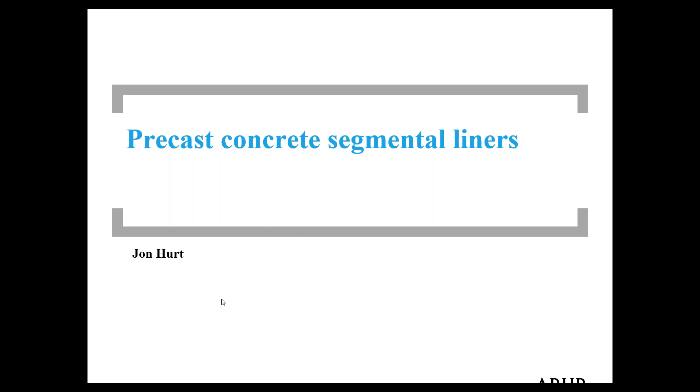Thanks very much for this opportunity, and as Colin mentioned, my topic's going to be precast concrete segmental liners. I think Colin already went through the introduction, so I won't repeat this again. But I've been working with segmental linings for over 20 years now and seen them develop quite a lot in that time.

So I guess as an overall introduction to segmental linings, just to go through some of the reasons we use them and the benefits they give us. Segmental linings allow you to place immediate support behind your tunnel boring machine. Obviously this is something in soft ground that's essential. You need to provide that immediate support there after you've excavated the ground.

They also allow a one-pass tunnel lining system, so you're putting in support as you tunnel, but you can also use that as the permanent support. You don't need to come and put another lining in place. So that's different, say, to a rock tunnel where you can go along, put in some temporary support, and then come along and cast a lining later. A segmental lining, which you can use in either soft ground or rock applications, allows you to put in a one-pass system straight away.

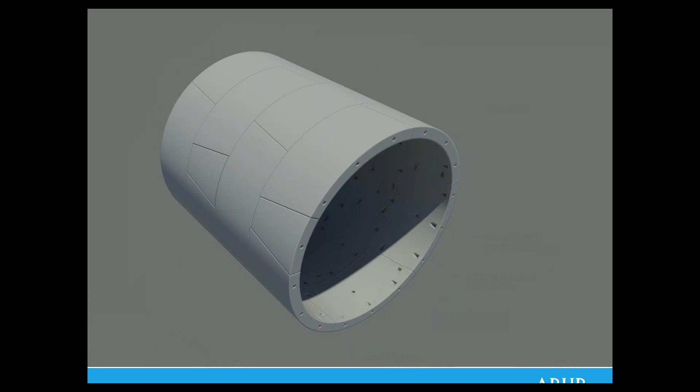To go through some terminology, first of all, this is an isometric of a tunnel lining, and the lining is made up of a series of rings, which you can see here. The length of these rings will vary with the tunnel diameter and the TBM equipment. Generally, the larger the tunnel, the longer and wider your ring can be. So you may be down at about a 4-foot ring in some of the smaller tunnels, whereas you can be up at 6 feet plus in some of the larger diameter applications.

Each ring is made up of a number of segments that will be assembled to form the ring, and I'll talk through some of the different geometry that we can get in the segments. But one important segment in the ring is the keystone, which is the last segment to be installed and makes up the circle.

The inside lining is often referred to as the intrados, and the outside is the extrados. Then we have a series of joints between segments: the longitudinal joints, which run along the alignment of the tunnel, sometimes also called the radial joints, and the joints at the face of the ring, known as the circumferential or circle joint.

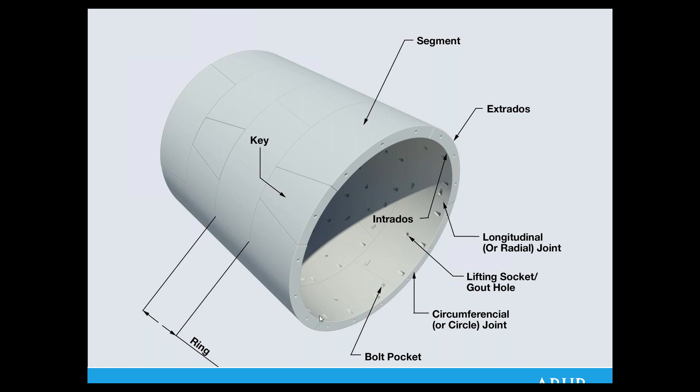I've put some useful references on these slides, which I believe will be available afterwards, just talking about various different guides on design, manufacture, and erection of segments into lining. There's the French Tunneling Society, AFTES, the British Tunneling Society, and the ITA has some guidelines, among others, and there's a good paper I've referenced as well.

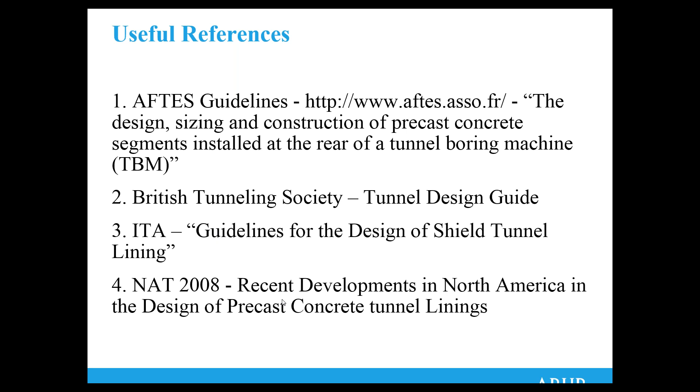So I said I'd talk through some of the different lining configurations, and these images are taken from the publications I mentioned, if you want to look into this in more detail. A rectangular lining, essentially, apart from the keystone, all the joints are 90 degrees, so it's a rectangular shape for each of the segments if you unrolled the tunnel flat. This is, I guess, how tunnel linings, segmental linings started off, and they're still very common today, especially in the very large diameter tunnels.

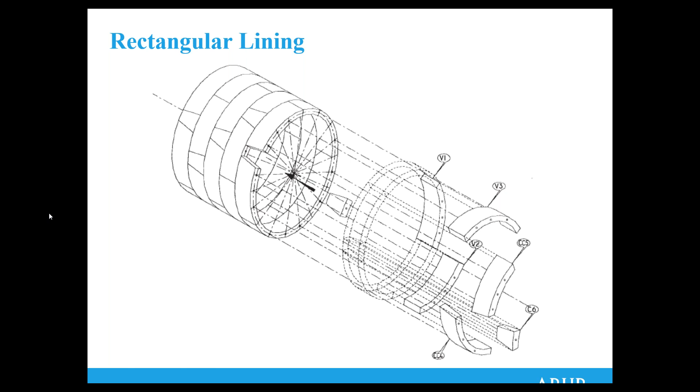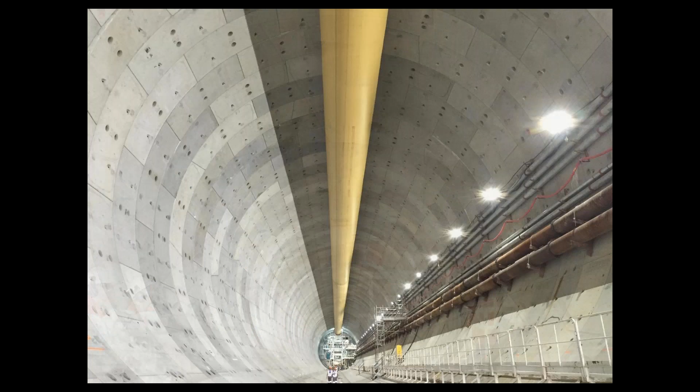This is currently the world's largest TBM tunnel. It's the subsea connection between Hong Kong Airport and the mainland that Bouygues is just finishing off. You can see here they've used a rectangular segment. The only angled joints are when you have a key, and it's a relatively large key here.

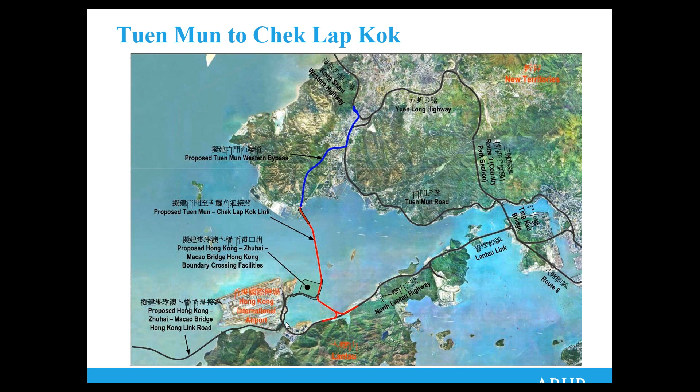Just to show you a bit more about this project, it's about 4 kilometers in length, running from mainland to the Hong Kong airport. The section highlighted there, through the section of reclamation, needed enough space for 3 traffic lanes and a climbing lane, so they used an extra large TBM, pretty much running the length of this reclamation.

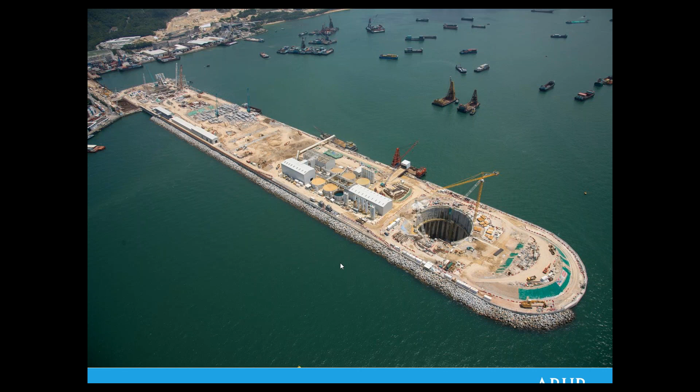Closer to home, there's also another very large diameter tunnel. In fact, I think the internal diameter of this tunnel is the largest, but the TBM is slightly smaller.

Up in Seattle, the SR99 Alaskan Way replacement tunnel - those following the news closely know that within a week it should be breaking through. There's just over 200 feet remaining as of yesterday. So it's interesting to see, again, a rectangular segmental lining. This time the key is a smaller key.

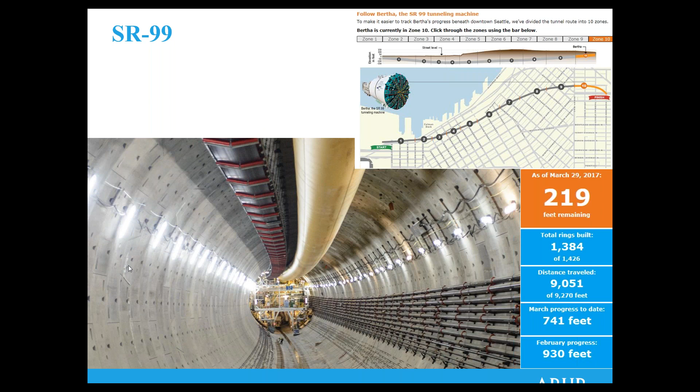As segments developed, people introduced the concept of angled joints, and this brings some advantages. One is you avoid the situation where you could possibly have 4 joints aligning, which is known as a cruciform joint, and that's not good for waterproofing with the gaskets. So this helps to avoid that.

This also brings the advantage that when you are installing the segments, the gaskets on the longitudinal joints are not in contact for such a long time, and it helps with the erection of the segments without damaging the gasket.

So this is a trapezoidal lining. It's also known as a universal ring because it can be placed in many different configurations.

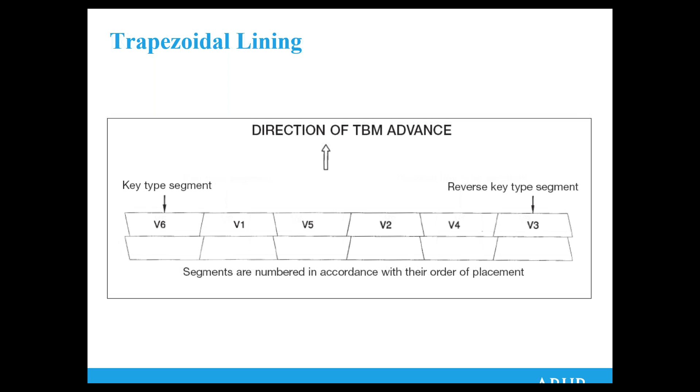Similar to that is a rhomboidal lining, which is very common these days. In this case, you start off with a counter key, which gets placed first, then you have rhomboidal segments, and you finish up with a regular key segment.

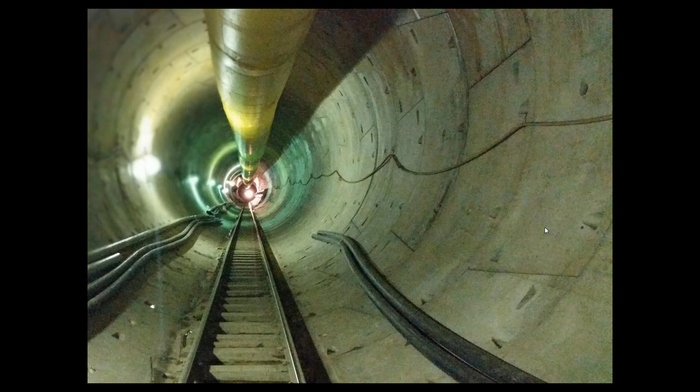And this is a photo from Lake Mead intake number 3. It's not a great quality photo, but this was a rhomboidal segment arrangement where we had five segments plus the key.

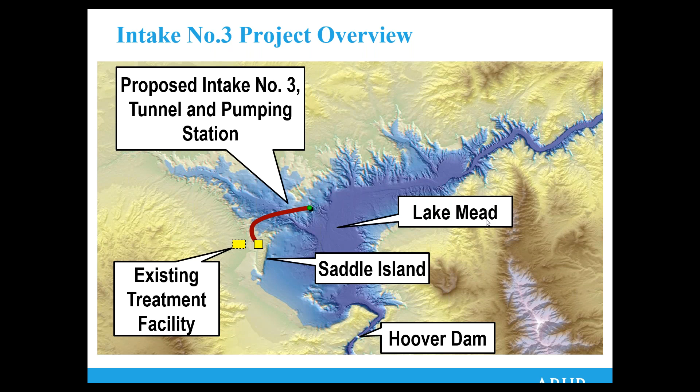Just to talk about this project in a little more detail, this is currently the world's deepest subaqueous tunnel. The lining and the TBM were designed to handle pressures of up to 17 bar, which is 170 meters of water head. It starts off in metamorphic rocks on the shore and heads out under the lake, and most of the drive was in sedimentary rock.

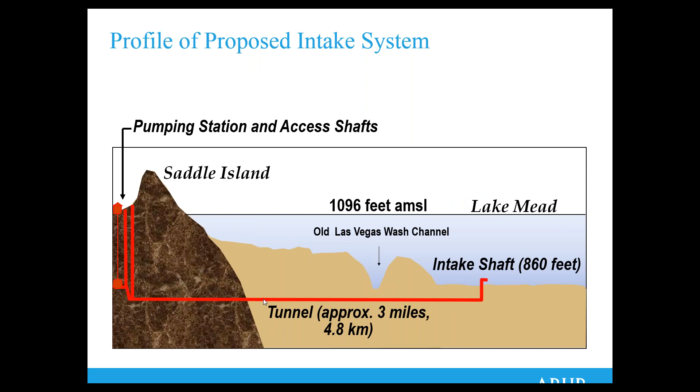So those are the main types of linings that you'll commonly see used, and I wanted to also cover a couple of other types that have specific uses. We don't see them so much these days, but they are suitable in some projects.

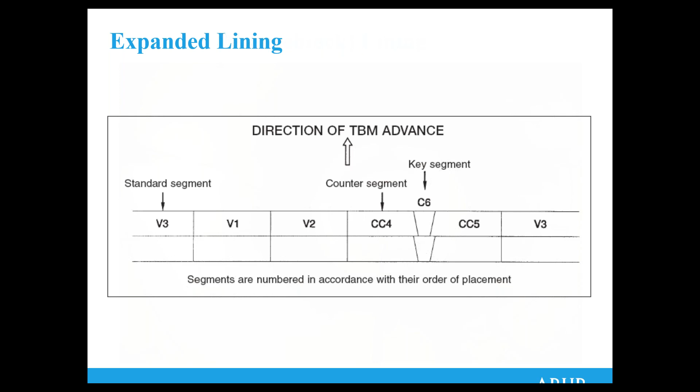One of these is an expanded lining. I came across this when I was working in London 20 years ago. We were able to excavate a tunnel in the stiff London clay, and then instead of having a lining which bolted up, you could just place the segments directly against the excavated surface and then push in the keystone, which you can see in the crown here, and it would expand the lining against the excavated surfaces. This type of tunnel lining system is appropriate if you have stiff ground that's going to stand up relatively well between excavation and placement of the lining.

It's not seen so much these days. It's difficult to waterproof because you don't have the ability to compress gaskets around the outside. But it still has uses in utility tunnels and other tunnels that are in pretty impermeable situations. It also allows a very fast excavation because you're not having to do any bolting or fixing the segments together.

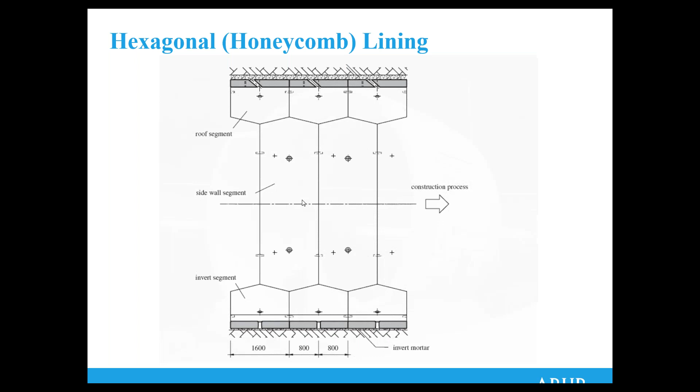Another type of system that also allows very fast construction is a hexagonal or honeycomb lining. You can see the configuration, but the segments in the ring are staggered so that they step half a segment as you go. There's a photo here that probably explains that better than I can. It means you can be continuously advancing your TBM by pushing off the two segments on the leading side of the ring while the other segments are going into place.

Again, this would be difficult to waterproof with a gasket system because it's difficult to compress the gaskets. So again, it's most useful in ground that's pretty self-supporting and pretty impermeable. It's certainly being used on some very long hydropower tunnels, for inlet tunnels and water transfer tunnels, where the leakage isn't quite so important.

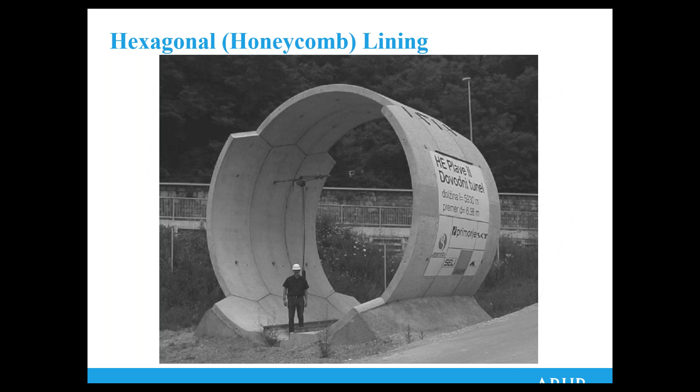So one other aspect of the geometry of segmental linings is the use of tapering, and this allows us to steer the lining around curves. When segmental linings were first introduced, to go around a curve you'd put thin sheets of timber packing between the joints on the outside of the curve to help steer the tunnel lining around the curve. But with the introduction of tapered linings, you can get away from using packing and just use the lining itself.

The way this works is that one side of the tunnel lining ring is slightly longer than the other side, so that the two circumferential joint faces are not parallel - they're at a slight angle to each other. And when you put the rings together, by locating the longest side of the ring in the right place, you can steer the lining.

As this exaggerated image shows, when you're trying to go straight, you would just alternate - you'd have the longest length on one side and then put it 180 degrees on the following ring. But as soon as you want to go around a curve, you can start putting the longer edge on the outside of the curve. TBMs with guidance systems will have this information input, allowing the operators to select exactly where the longest edge of the segment goes.

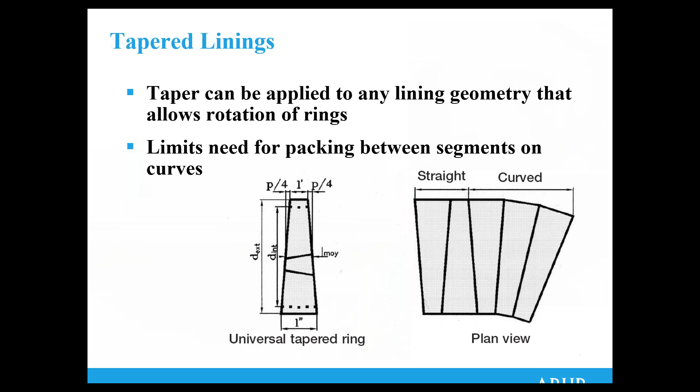So another important aspect of geometry in segments that we spend quite a bit of time on during design is the design of joints. We're aiming here to make sure that we don't see damage when the segments are placed together and then loaded up, and we're also making sure that we can meet good tolerances.

As the photo on the left shows, we have a raised section in the middle of the segment, and then recesses all around that. I like to call these recesses a stress relief groove - this is so that if the segments are put together and they're not perfectly in a true circle, so that the joint is angled slightly rather than being completely flush, then the segments will be bearing against each other not right on the edge of the segment, but on the edge of this raised section. That avoids damage from having all the load of the rings pressing together right on the inside edge of the segment.

You can also see the various recesses for the bolting system formed into the segment, so that when you put the bolts in, in this case you have the socket already embedded, with a slightly enlarged section that helps guide the bolt in when you're putting it together. Then on the other side of the segment is where the bolt will come through from the inside face into a socket like this.

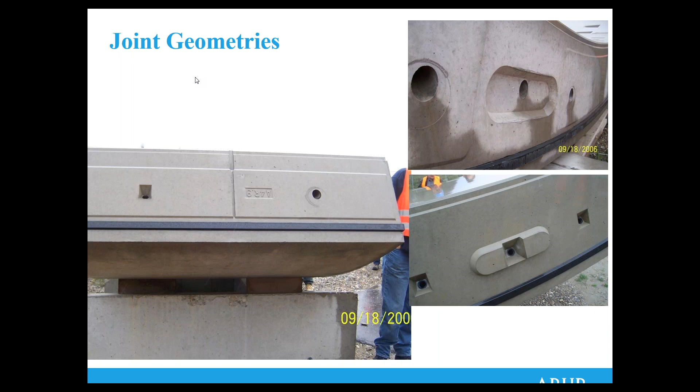So I've been through geometry, and I'll now talk about some of the materials we use in segments - the use of reinforced concrete, the use of steel fiber reinforced concrete without or with rebar, or sometimes in a hybrid solution. I'll talk about the use of polypropylene fibers for fire resistance, how we deal with concrete lining in sewer tunnels where we may have hydrogen sulphide attack, and I'll briefly talk about the metal segmental linings we saw earlier in the presentation.

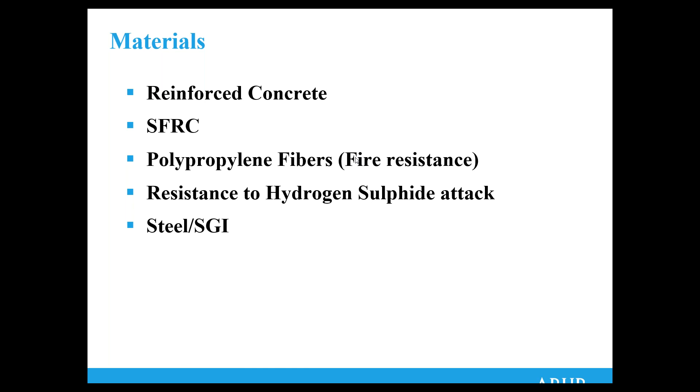So I mentioned one of the advantages of segments is the factory quality that we can get, and certainly this means we can get a very high quality concrete. Many of our tunnels these days have design lives of 100 or 120 years, so to achieve that we're looking at very high quality concrete.

We also rely on the concrete for watertightness. Apart from the joints, which are sealed with gaskets, the prevention of water flowing into the tunnel is also taken by the concrete itself. So we want a very dense, impermeable and durable mix resulting from that.

So you'll often see that the specifications for precast concrete segments are higher than you would normally see for a typical site mix. One thing the manufacturers like is to have a relatively high early strength, because they want to use their molds as often as possible. Being able to take the segment out of the mold at an early age is important.

So for the reinforced concrete, we would normally see prefabricated cages of reinforcement used. This just speeds up the manufacturing process. So the design of the rebar takes into account the fact that it should be assembled as a cage and either welded or tied. Different manufacturers have different systems as to how they do this.

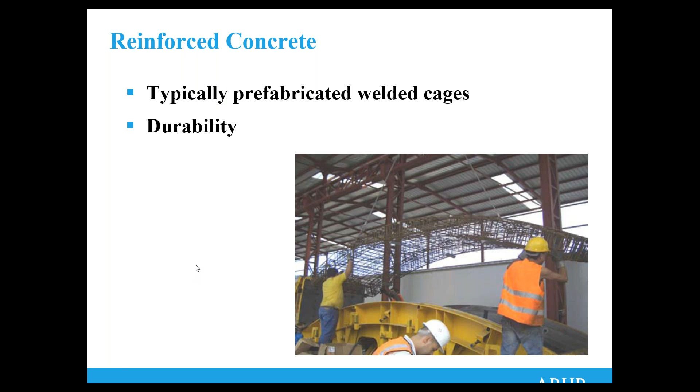The arguments for steel fiber are really two main ones. One is that you can get better durability - you don't have a continuous reinforcement cage in your lining that you need to have adequate cover protection for. You can use steel fiber, a discontinuous kind of steel fiber matrix, so generally the durability of steel fiber concrete is considered better than concrete with a reinforcing cage.

That's one advantage. The other advantage is it simplifies your manufacturing process - you have less labor requirements for fixing and placing the rebar. Although material costs also come into the equation, generally it's considered to be a cost saving. The cost saving varies where you are around the world, depending on the cost of labor.

One concern you often hear raised about steel fiber segments is, when you have a rough surface on the inside of the tunnel - because this is a formed application, you get beautifully smooth segments. People are often thinking of shotcrete linings where the fibers stick out, but with formed segments you get a very good surface. At most you might see a very slight discoloration if a fiber is lying very close to the surface, but it's been well proven not to be a problem.

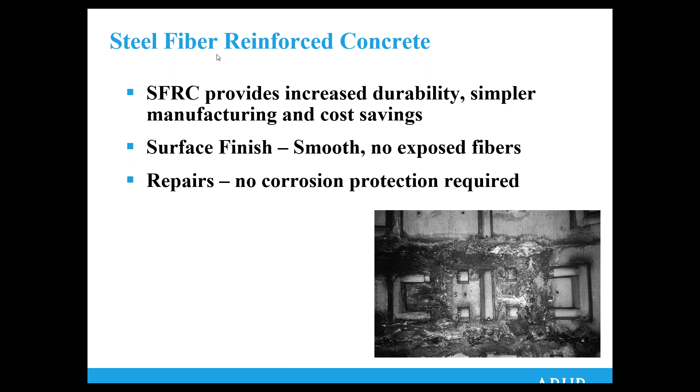So that was steel fibers for structural reinforcement, but polypropylene fibers, which I want to discuss now, are primarily used for protection of the lining in the case of a fire.

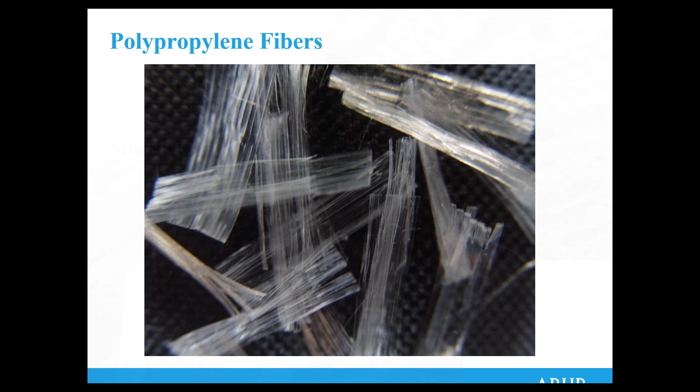In the 90s there was a spate of tunnel fires. The Storebelt happened during construction, and the Channel Tunnel was during operation, and in both cases there was significant damage to the segmental lining.

These fires can see extreme temperatures, and if you're trying to hold up cohesionless ground of sand and gravels with high water pressure behind one of these segmental linings, and you're having a fire which sees a loss of section due to spalling, it could potentially be a very serious tunnel scenario.

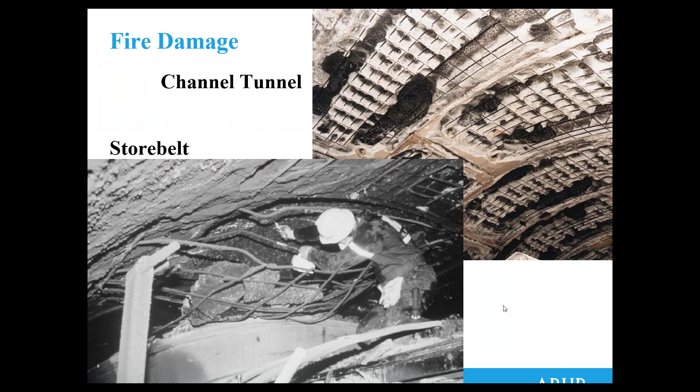So polypropylene fibers were introduced as a way of limiting the damage you get during a fire, and they also have the advantage of minimizing explosive spalling. When the spalling event happens during a fire, often the parts of the lining that come off are actually ejected at quite high speed, and if you did have any emergency personnel in the tunnel, that could be a potential danger.

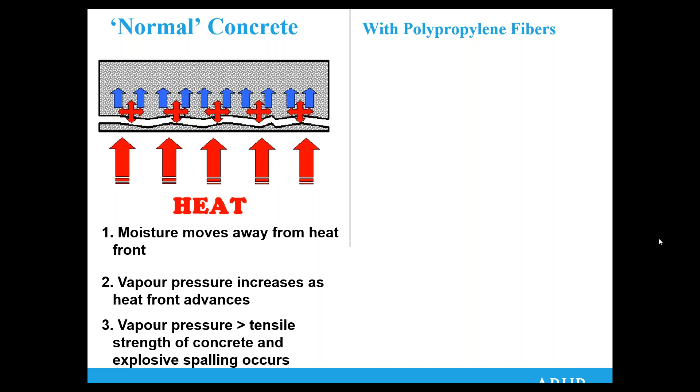To explain how these work: in normal concrete, when you expose it to these high temperatures, the heat is trying to force the moisture to move away from the heat front, but the vapor, the moisture in the segment, is trapped and can't really move. So it results in increasing pressure, and that pressure eventually grows stronger than the tensile strength of the concrete and causes this explosive spalling, with bits of concrete flying off into the tunnel.

So the use of polypropylene fibers is believed to avoid that situation by causing a maze of interconnected capillary ducts that allows the pressure to escape. The fibers melt at a relatively low temperature and allow the pressure to dissipate, so you don't have the tensile strength overcome, and it minimizes damage to the segments.

In terms of design, there was some reduction in strength of the concrete exposed to the higher temperatures, so we had to consider that reduction, but we didn't have to consider the loss of section.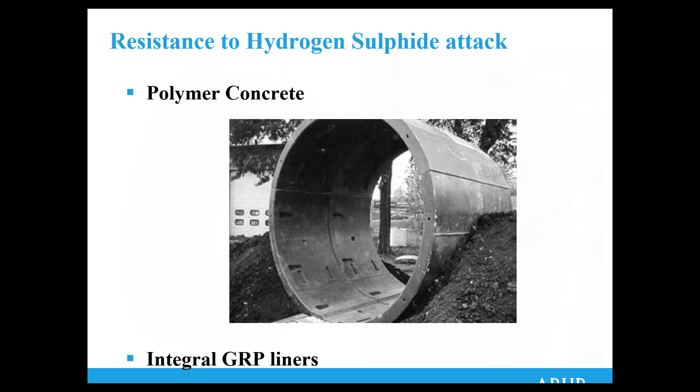The other way that is being looked at the moment with segments to provide a one-pass solution is to use integrated glass fiber linings within the segments. This is a solution that's patented by Herrenknecht called combi segments.

So you have the HDPE lining cast into the front face of the segments and going round the corner up as far as the gasket position. So any concrete surface that is exposed to the sewage is protected by this lining.

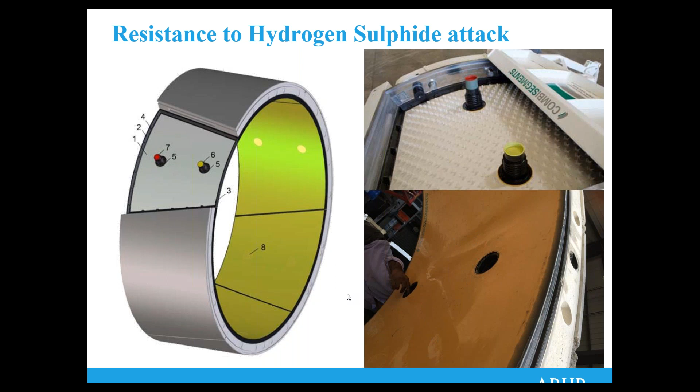I did mention briefly about steel and other forms of metallic segments, and we normally use these around cross passages where we want to provide a bit of a stiffer opening, a stiffer frame around a future opening.

If you have many occurrences where you need these openings, the casting may be cheaper.

And these are fabricated to be the same types of sizes as the concrete segments, and they would have a facing plate put on so the TBM erector can lift them into place. Then once the tunnel is complete, you can come back and mine the cross passage with less support needed.

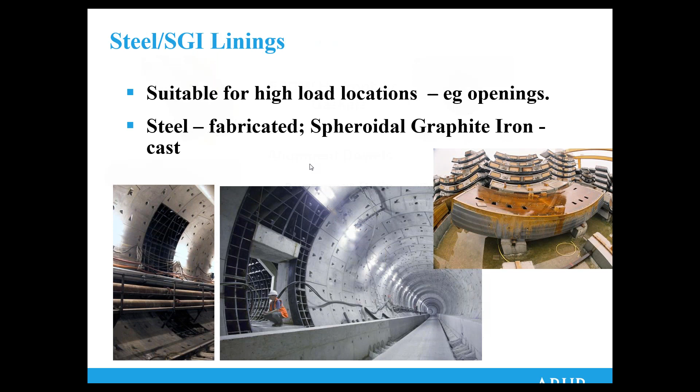So I talked about materials. We also have various fixings that we use with our tunnels. I'll talk about gaskets in more detail. To join segments, we either have a bolted system or dowels, or a combination of both.

Dowels work in the circle joint, and it's basically a press fit. You're pushing the dowel into preformed holes in the concrete lining. Once the segments are pushed together, the dowels have teeth to hold the segments together.

And with bolting, you have the socket cast into one segment, and you bolt through a preformed hole in the other.

Typically, you can only use bolting on the longitudinal or radial joints because the dowel geometry doesn't work, but on the circle joint, you can use either solution. Generally, dowels are faster and quicker and a better solution overall.

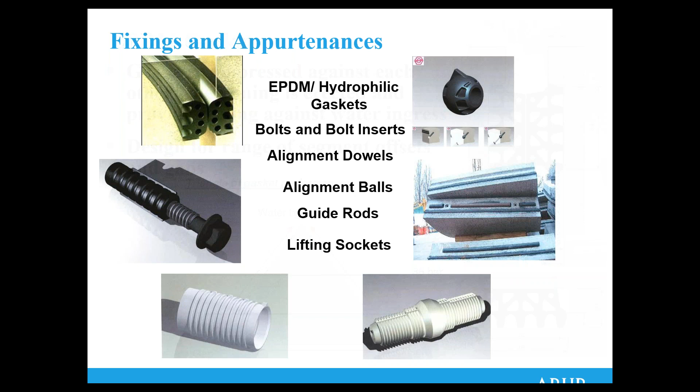So gaskets, these are an essential part of the lining because they provide the watertightness. As I mentioned before, you have a gasket around each segment on the extrados side typically, and they sit in a groove, and the groove dimensions are very carefully calculated by the gasket manufacturers.

And it's very important because the way these gaskets work is as you compress the segments together, the gaskets get compressed down. You can see they've got various holes in the gasket profile that allow it to be squashed. But essentially, it's the force of the two gaskets pressing together that creates the watertight seal.

And so the geometry of the segment is very important to help that happen. So the manufacturers will work with you during the design and manufacturing stages to make sure the gasket is the right pressure rating for your tunnel. But we have this triangle of gasket performance.

If there's a gap between the segments, that tends to reduce the effectiveness of the gaskets, as you'd expect, they're not compressed against each other so hard. If you have an offset between the segments so that the gaskets aren't overlapping quite as much as the optimum position, that also reduces the water tightness.

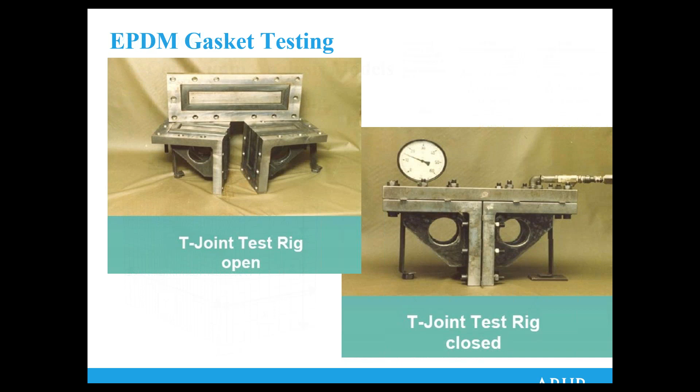So all gaskets are tested, and the T joint is the most critical location. So this rig is used to test it and make sure that you hold the pressure. The other data you'll need from the manufacturer during the design process is to understand the forces needed to close the gasket gap and make sure your segment is designed to accommodate that.

I'll just talk quickly through the ring design of segments. There's quite a lot of guidance, and there's a whole range of different methods ranging from continuum analysis methods where you can use spreadsheets, beam spring models, and then numerical analysis, either 2D or 3D.

I think the important thing to remember with numerical analysis is, your worst design case is often when you get high overburden. That's your case that gives you the highest thrust loads in your segments.

And so when you're considering what relaxations to apply to the face, you need to really think about the worst scenarios that can happen with the TBM, including it not operating as it should. You still want your tunnel lining to stand up if you've got a ground disturbance, and that design carries through the whole alignment. So that's one critical load case, which is a high thrust case.

And when you get deep tunnels like Lake Mead with very high external water pressures, that tends to be what governs the design. Often on the shallower tunnels that we would typically see from metro or subway projects, it's more likely that the segment design is governed by a high bending moment case with the low thrust.

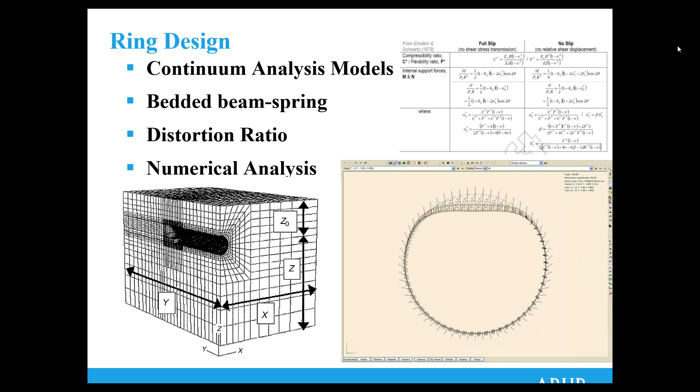So your most critical location is probably where the tunnel is shallowest. But we would normally go along the alignment, pick out critical sections, both in terms of the different loading cases causing high thrust or high bending, and then the different ground conditions. The stiffness of the ground will impact how much loading you will see.

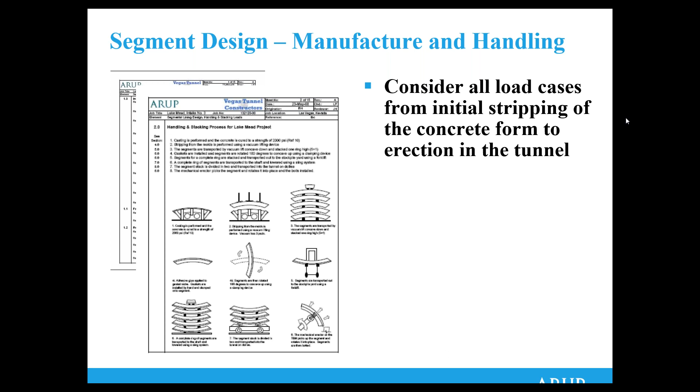The other important thing to consider during segment design is the manufacturing and installation cases. So often the most critical cases are actually during these cases, rather than when the segment is in a nice circular shape with balanced hoop loads in the ground. So we would consider all the load cases right from stripping from the mold.

When the segments are turned, when the concrete is still relatively early strength, transporting around, and certainly when you get into some of these job sites, there's some fairly interesting ways that people maneuver segments around, and then they get lifted into the tunnel and put into place, and then there's a lot of force put on from shove rams.

I guess one of the key areas of design is dealing with the joints, and this is where you're applying your loads to less than the full thickness of the segment, either from the shove ram pushing the TBM forward, or from on the radial joint, the hoop load in the segments.

And one thing we do need to consider is bursting stresses, where you have your stresses applied over a narrow area of the segment, similar to a design of an anchorage in a post-tensioning situation. You have to look at what happens as the forces spread out in the segment and create tension. So you'll often see rebar in the segments that has ladders on the side here with some bars designed to stop that bursting effect.

And there have been segment tests done to look at this bursting effect, and there's some interesting papers on projects that kind of show the types of capacities you can reach.

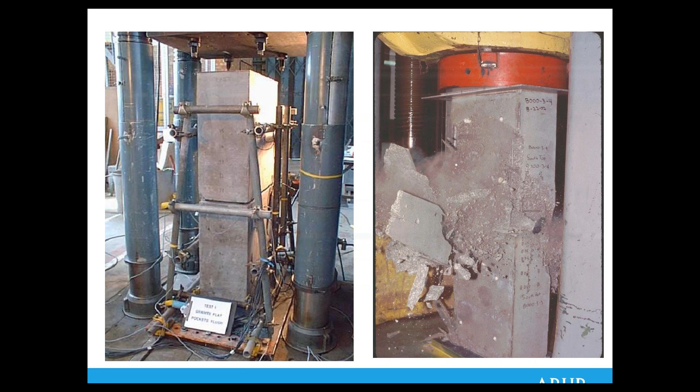So I'm going to very quickly talk through the manufacturing and installation process now, and hopefully have some time for questions at the end.

There's various different types of manufacturing plants. This is a stationary plant, which means the molds are kept in the same place the whole time, and you bring the materials and the concrete to the molds. Typically these work on a 24-hour cycle, so the day shift will cast the segments. You may then cover them to allow steam curing, and then they're removed from the mold the next morning, and the process repeats itself.

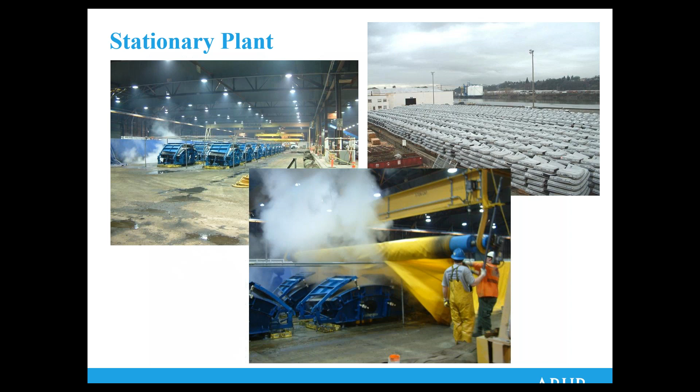You can speed up the process with a carousel plant, where the molds travel around the factory on a rail system, a series of stations. This is like the assembly line you'd see in a Ford factory. Each station has its own particular job, whether it's removing the previous segment, cleaning the mold, or putting in the various fixings. The advantage is you get more use out of your molds, probably 3 segments a day out of each mold.

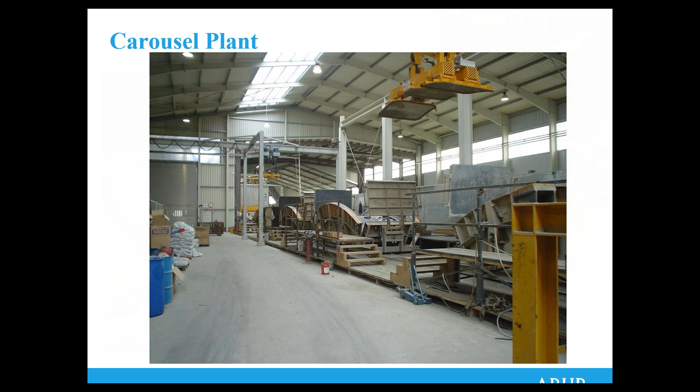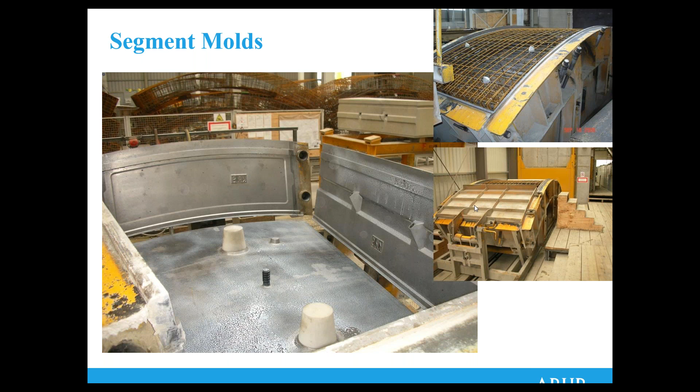The molds are machined metal. These have to be built to high tolerances, typically 1 or 2 millimeters maximum allowable tolerance on the segments. They also have to take the strain of repeated use. If you're using this several hundred times, you want to make sure the segment tolerances stay the same throughout. So the molds tend to have sides that can move back to allow for stripping of the segments, and then covers on the outsides that help form the outside shape.

In terms of concreting, you have your mold, and if you have a rebar cage, you have the cage in place. The concrete is placed, vibrated into place, and then the outside surface is screeded and finished off. Vibration is obviously very important, as with all concrete placement, and you can either have vibrators fixed to the concrete molds themselves, or use external vibrators.

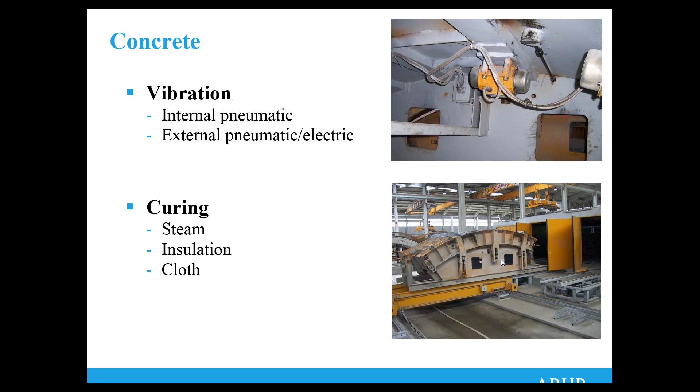Then the segments are cured, and what you'll often see in the carousel factories is a steam oven, which speeds up the process further. The segments go into the steam oven to help them gain good early strength and improve the quality of the concrete.

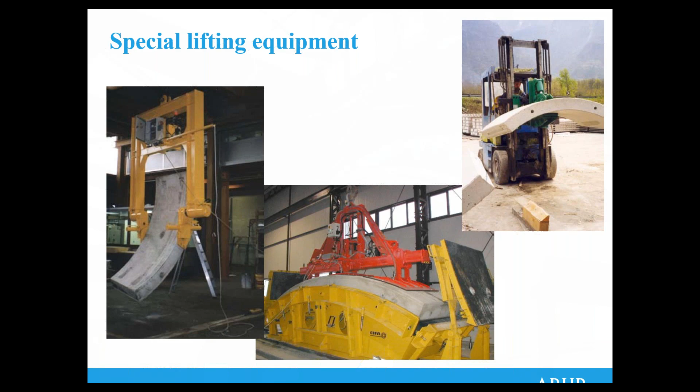I mentioned lifting equipment. You just need to be aware of what your contractor's using. For example, this was a job in the Dominican Republic, where you may have some more interesting devices. You need to make sure your segment's designed for the single point lifts we saw there. These vacuum lifts or side grips help to distribute the stresses very evenly. There's just a view of a vacuum lift of a segment out of a mold.

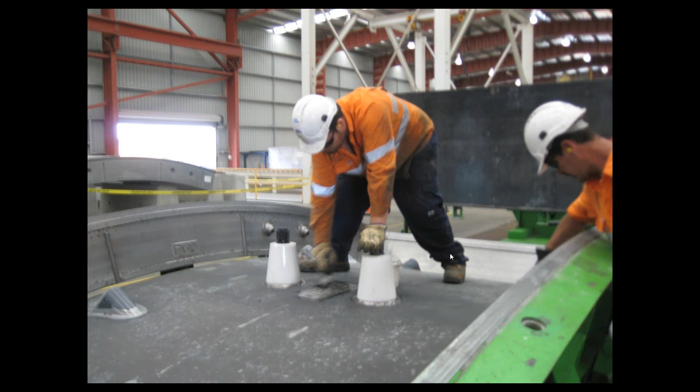So quickly go through the process in the mold. First of all you're cleaning the mold, then putting in the various fittings, such as the recesses here for the shear cone.

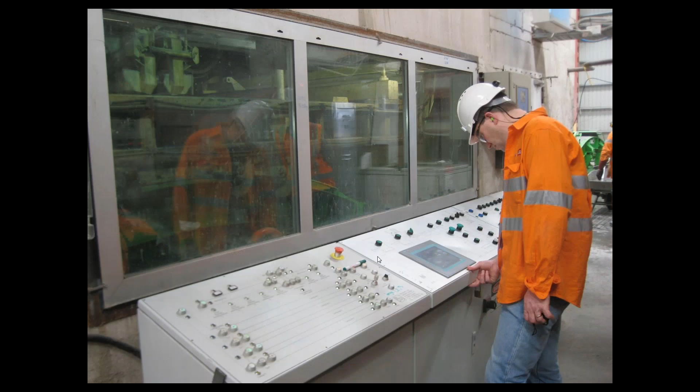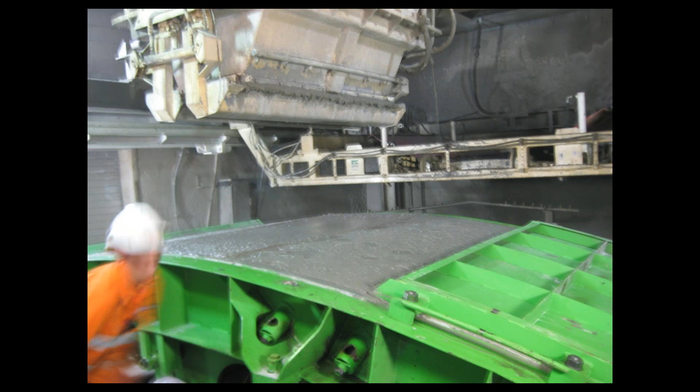This is the concrete placement, inside an insulated shed. This is like factory conditions, so you want to isolate your workers from too much noise. The concrete work's going on behind these windows here, and this is what's going on inside. In this case, concrete was batched for each segment, so you could control the volumes very carefully.

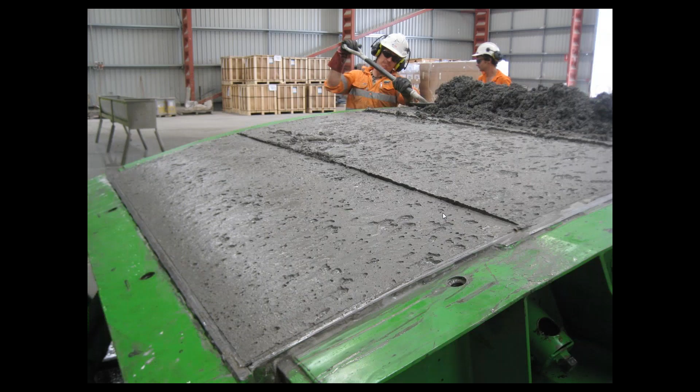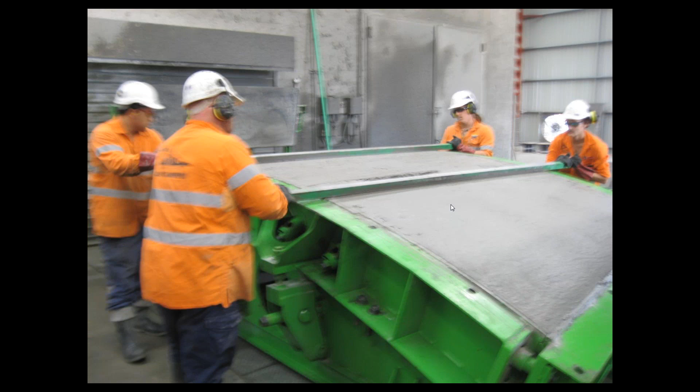So then the outside surface is finished, generally tamped down and then troweled. It's important to get a smooth finish here, as this affects the TBM as the segment is pushed out. You use tail grease to maintain a seal between the segments and the TBM, and the rougher you make this surface, the increased amount of tail grease you'll be using - so smoother is better. You can just see them being troweled off and finished.

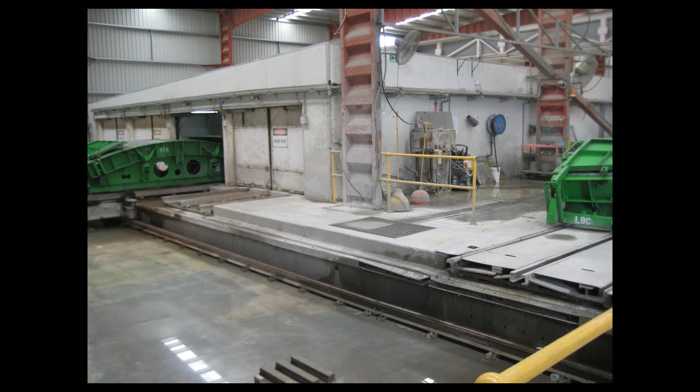Segment going into the oven, coming out the other side.

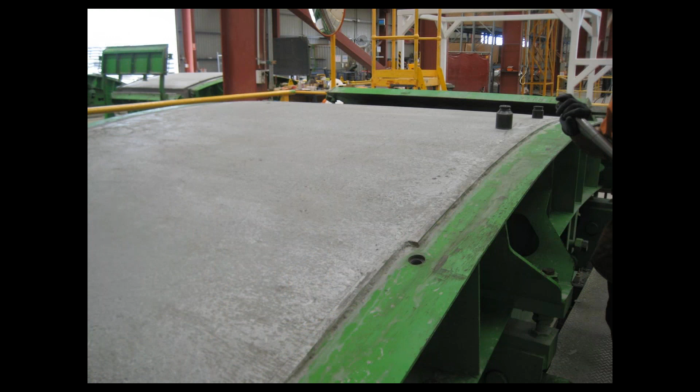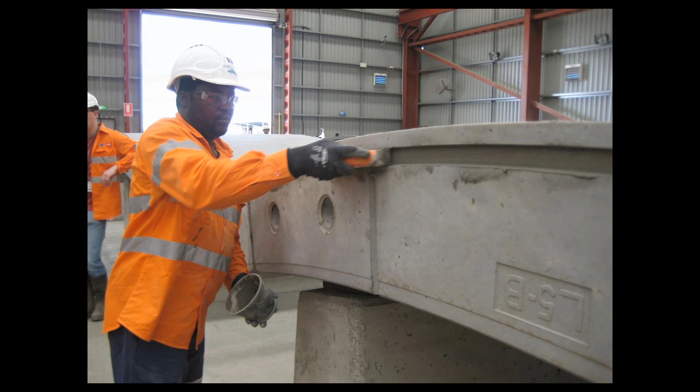Then it's time to strip the segments. The covers and the sides are removed, and the segment is lifted out with a vacuum lift in this case. At this point, it's good to make any cosmetic repairs. As I mentioned before, the gasket grooves are important. If there's any blowholes or pinholes, it's good to seal those up because it will impact the effectiveness of the segments.

I'm going a little bit fast because I want to leave time for questions.

Gaskets are installed and pressed into place with the frame.

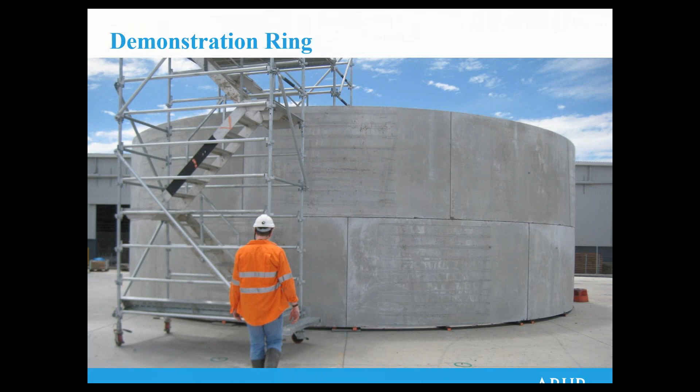We often build a demonstration ring at the beginning of production to make sure that all the tolerances are working correctly and everything fits together. You obviously have to build this without gaskets. This is back on the Brisbane Airport Link job, and you can see everything fitting together nicely. You would do all your checks of geometry to make sure everything's building to the correct diameters.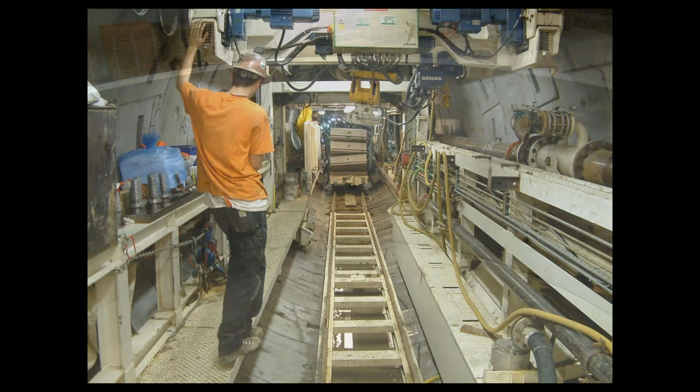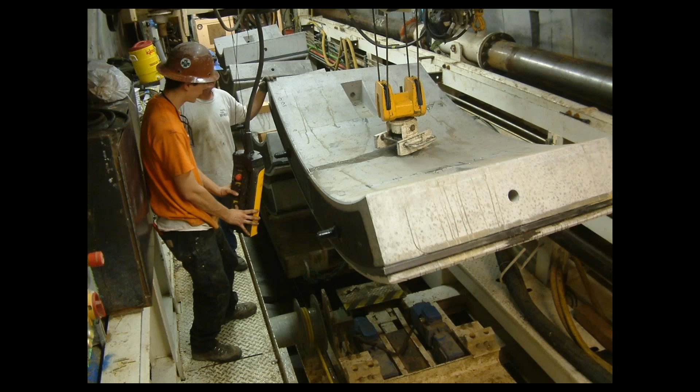So, installation in the tunnel. The segments arrive down in the tunnel on the train. They're picked up and moved to the front of the TBM. When they're in the front of the TBM, they're picked up by the TBM segment erector.

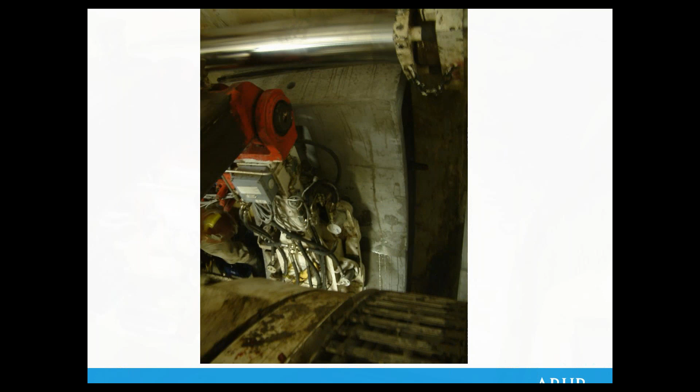On the lining itself, the thrust rams from the TBM are removed from the portion of the previous ring where the new segment will be placed. Obviously, the rest of the rams need to stay in place to hold the TBM and the rest of the lining in place. So you remove the shove rams, then move up the segment erector to position the segment into the correct location. That's the segment in location there.

If dowels are being used, the dowels have been pushed into position by now. If you're using bolts, you would need to bolt up the segment. Then the thrust rams are put back on, and you repeat that process around the whole ring to give you the complete ring.

Just quickly to talk through annulus grouting. As I mentioned before, we need to fill the void behind the segments. Especially in soft ground, we want to fill that void quickly and with enough pressure to minimize settlement.

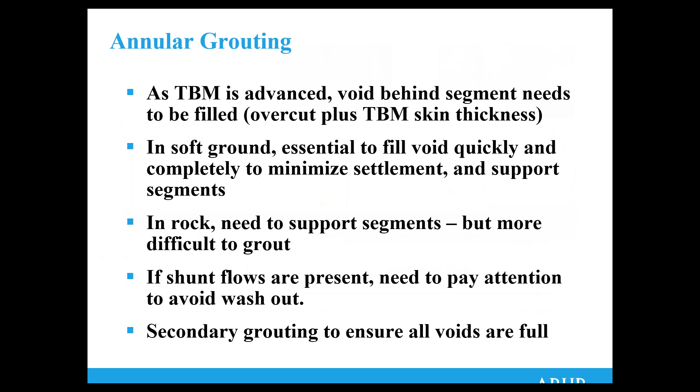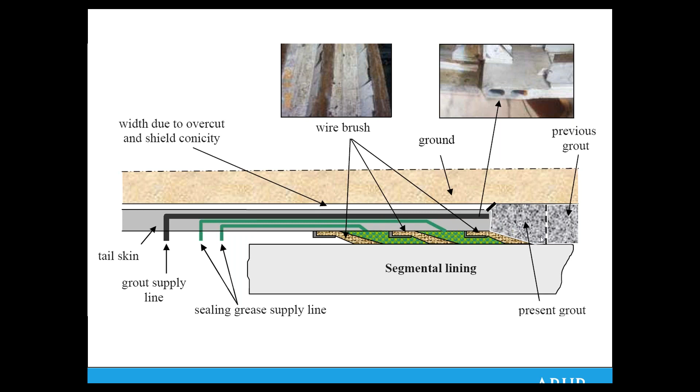We can use a whole range of different types of grouts. There's some fairly inert mixes with a lot of sand and fly ash that are sometimes used, or you can use a two-component mix with an A and a B component, so that it basically gels within a few seconds of being placed around the lining, and provides very good support to your lining - that certainly has a lot of supporters. The grouting is generally placed through the tail skin of the TBM, and there's lines that allow you to pump the grout, and they come out at the back of the TBM at the end of the tail skin.

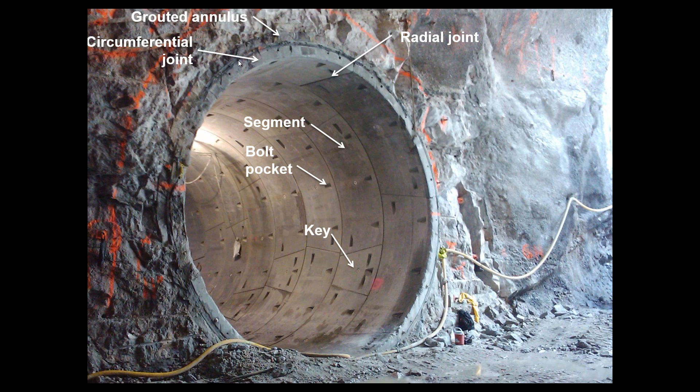I showed you this picture before, just a reminder of the grouted annulus, and certainly on 7 line they did a great job of having a completely filled annulus, with good support to the lining.

I have a few slides on segment damage. I think the underlying message here is that if you build your segmental rings with very careful attention to tolerance, getting everything as close to a circle as possible, and making sure the circumferential face is plane, then you'll see very little problems with segment damage. But as soon as you lose control of your segment build, you'll start to see damage, whether it's due to steps in the lining or just unequal bearing of the segments.

There's some useful papers and research that's been done looking at different types of damage, and I think some of the main conclusions are that you see more damage on curves. That's where you tend to lose the geometry, and you also tend to have the TBM pushing harder on one side of the segment than others.

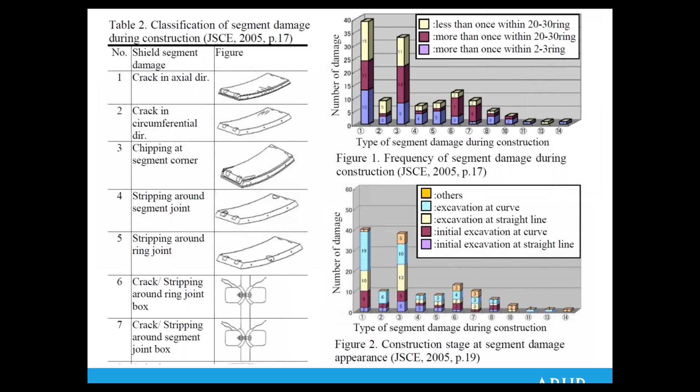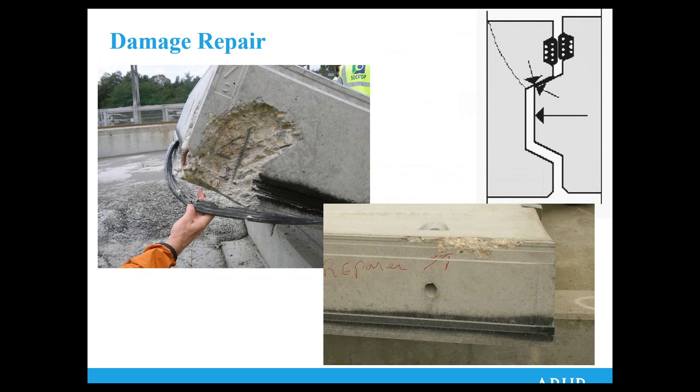There's obviously some damage that you just can't repair, like the image on the left-hand side, and other damage that you can repair, such as superficial damage on the inside. There's some good guidelines out there from various different tunneling societies and standard specifications on specifying exactly what repairs need to be done and what type of materials need to be used.

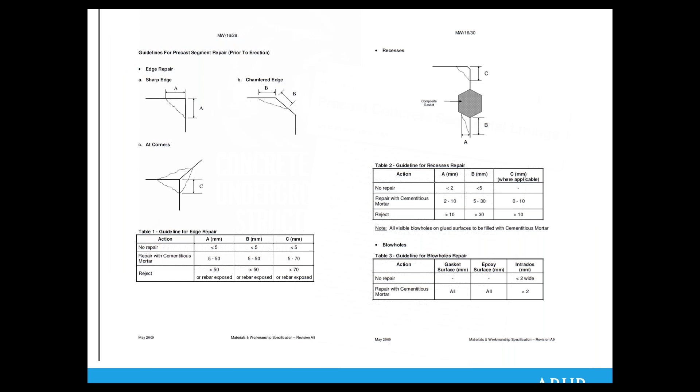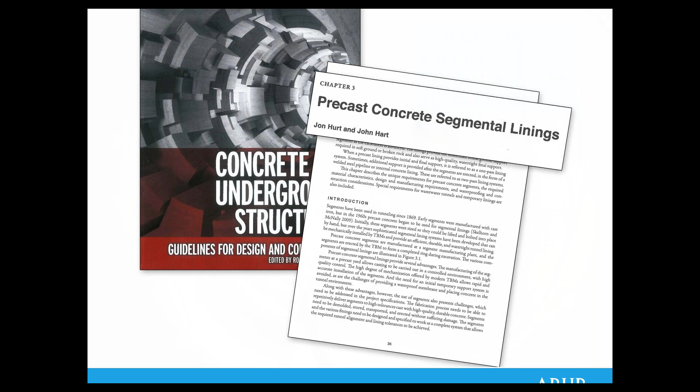So I've taken up nearly the full hour - apologies for that. There's a lot more information in the Concrete for Underground Structures book that SME published a few years ago. I helped put together the chapter on segmental linings together with Jon Hurt from CSI, who is a segment manufacturer. There's also a standard spec as part of that book that might be of use.

And with that, I think if there's any questions, I have time to take them now.

Yes, we do have several questions that have come in already. Thank you, John, for a fascinating presentation.

The first question asks, is SFRC synthetic fiber or steel fiber? So it's steel fiber. As I mentioned, the steel fiber has a good track record of over 20 years of use now, and the synthetic fibers are certainly being looked at and researched at the moment. I think a few trial cases have been used in tunnels as well, so synthetic is certainly an area of development being looked at. Thank you.

The next question is, what do you think about the use of specialty admixtures in precast segments? For instance, corrosion inhibitors, antimicrobial admixtures, crystalline capillary waterproofing admixtures. Would you like me to read it again?